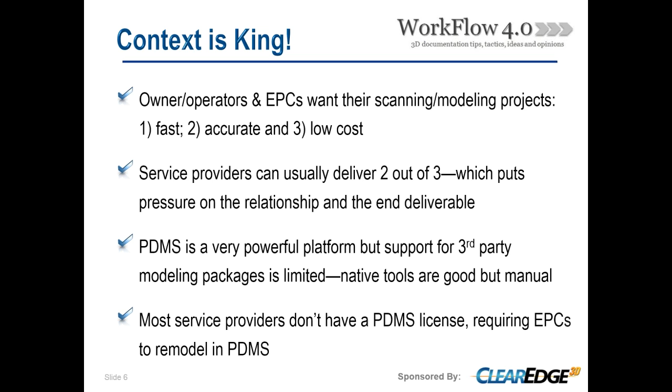And the workflow that Matthew Bird is going to talk about really dramatically reduces that whole amount of time. So let's go to the next slide, and I will hand it over to Matthew. Matthew, you're with us. All right.

Yes, good morning, thank you. All right, take it away, Matt. All right, thanks for being here.

We're going to be reviewing a case study of a recent oil processing facility that we did scanning and modeling on. So we'll go to this next page.

First, a little background on DeWalt Corporation. Located in Bakersfield, California, just about an hour north of Los Angeles, DeWalt was established in 1965, a civil engineering and land surveying firm, working a lot in residential, oil field, and multiple other services and industries.

So our scope for this project, as you can see on the right in the blue highlight, is the entire 600 by 600 foot area that we were requested to scan. Inside that is the entire facility, as well as outside areas of pumps and pipes, and in the middle there it's quite detailed.

First we were to scan that and provide an ortho photo of the site, which we produced from the point cloud, and we geo-referenced that onto the coordinate system they're using.

Next, we would deliver a complete 3D colorized point cloud, which we found very useful inside programs like Navisworks for site visualization, just using it to review a project with a clean point cloud.

It's very useful. We would then do the as-built 3D model of a requested area. We didn't model the entire facility, as they have it split up into different sections based on what they would be utilizing currently. You can see on the bottom right, highlighted in red, the area where we would begin our modeling.

Once the modeling was done, we were to deliver it onto a requested coordinate system and be able to import that into PDMS and AutoCAD formats.

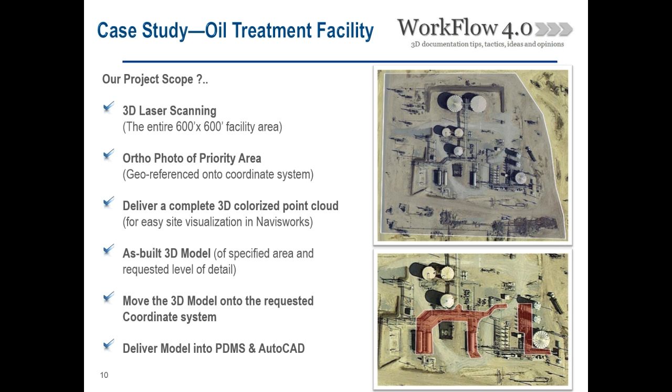So here were a couple unique challenges. As you can see on the right, some of those areas inside of the red where we were to model, from the top aerial photo, it doesn't look quite all that detailed, but once you get inside the site, you can see in these pictures there's a lot going on. There's a lot of pipe, supports, valves, flanges, just a lot of stuff that you don't want to miss.

So we needed a quick turnaround time. Our goal was to do 3 weeks from start to finish.

Another unique challenge in a large project is managing your data. We ended up with nearly 500 gigabytes of data. As you know, with scanning, scan files, as you bring them into multiple softwares, they can create their own specific file types inside different softwares, just compounding and compiling new files and new sizes.

And of course, because of the amount of modeling we had to turn around, that was another challenge. Estimated over 3,500 feet of pipelines, and inside of all that there's valves, flanges, pipe supports, concrete foundations, vessels, tanks, equipment, and a lot of steel.

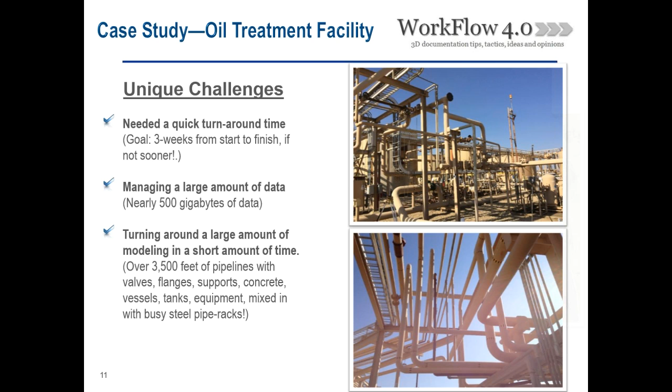So we'll move on to the next page here and go over a little bit of our workflow. The image on the right is kind of a way that we use to do planning and mapping on how we're going to best capture a site when we get in.

So the scanner we used is a Faro Focus 3D. We're very happy with this hardware and equipment. We start by using the aerial photo and map out a per day scan area we want to try to capture. We had a priority area being what we needed to model, and we made sure we covered that first. As a best practice, once you get in the field, we would choose where we want to start and get that first scan going as quickly as possible.

During that first scan setup scanning, depending on your quality and resolution, you'll have 3 to 10 minutes of a window that you can continue mapping out your locations for the next scan setups while that first one is going. This just kind of helps you maximize your scans.

So as the scanner is going, we'll walk through the site and map out the scan locations and the best route to make sure we capture all the data that's needed. As you saw in those previous pictures, there's a lot of things to capture, and if you don't have the correct and enough setups, you may miss some critical data.

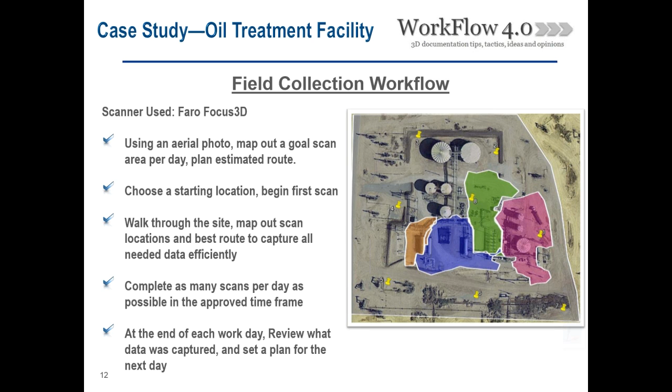Of course, we would complete as many scans per day as possible while staying in the approved amount of time. And at the end of each day, review the data captured and set up the plan for the following day. So we know where we scanned, where we ended, where we started, what was captured, and what might have been missed. That just helps make everything go efficiently.

Our field crew is normally 1 to 2 people. The tasks on the field side are laser scanner operation, just moving the scanner, going to the setups, starting it. If you're using targets, making sure you have your targets set up, moving those in between setups.

Walking ahead, if you're in a field and dirt, we'll sometimes use paint or put something on the ground and plan our scan setups beforehand. We'll also take photos of whatever it is that we're going to be scanning and modeling. That way, if something is blurred in the data or something might get missed, we can go through photos and see detailed pictures. Those are just ways to make sure that we capture all data that's needed.

Planning your route ahead of time is a great time savings and a good way to make sure you don't miss anything.

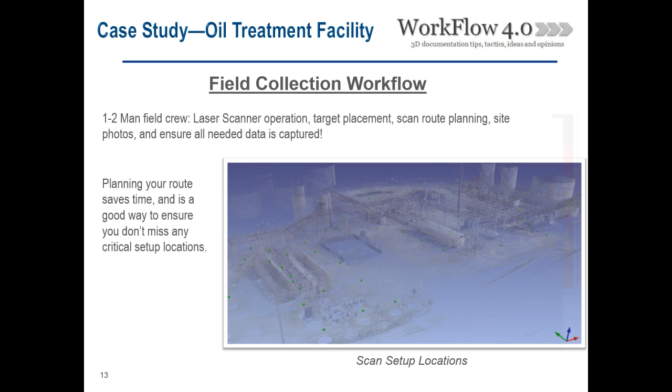So once we're done with the field portion and we get all of our scan setups, on this specific project we utilized Autodesk Recap Pro, which is a new software for registering scans targetlessly. We also did use Faro Scene a little bit, kind of a combination here. Autodesk Recap Pro actually was released and came out the week that we were using it in this project. We were one of the first people to actually get it and utilize it as the released version.

We registered our scans, indexed them into the Autodesk Recap project format, and from Autodesk Recap you can export it to multiple file types, and from there move it into the preferred modeling software. As you can see here, this picture is actually inside Autodesk Recap, and we have it in an elevation view. There's some cool tools inside of there, and this is one of them, so you can set it up and see the ground contouring. You can see where water might gather. Just some cool tools.

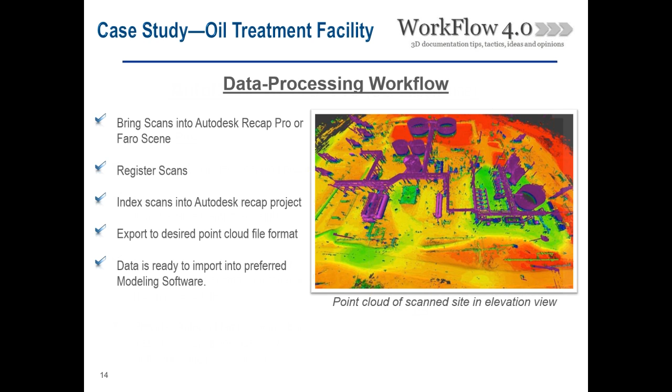So, some of the experience we had during using Autodesk Recap Pro. It is a new software. There's a lot of interest in it, and this is some of the things we've seen.

Some of the pros, obviously in scanning, as you know, targets do take up some time. If you can go to a site and use no targets, and all you have to worry about is moving your scanner and keep scanning, it's really quick, it's really efficient, it's great. So if that's all there was to it, it'd be great.

There are some other things though. Like I said, it does overall faster laser scanning because you don't have to move targets and worry about line of sight and making sure you have enough targets. It does turn your field portion into a one-man job. You won't need two people if all you're doing is moving the scanner. You don't have to move your targets, you just plan your route and scan. It's very, very easy and efficient.

And also Autodesk Recap, being an Autodesk product, the file types that it provides, the RCS and RCP, are great for other Autodesk applications such as Navisworks.

Some of the cons that we've seen are because the software is brand new, it does have some things that need to be worked out. We had some stability issues in the beginning. It would crash sometimes randomly, and it wouldn't save our progress, but we were able to work through those things, and I think they've already fixed some of them in some patches and releases, so things are continuing to improve.

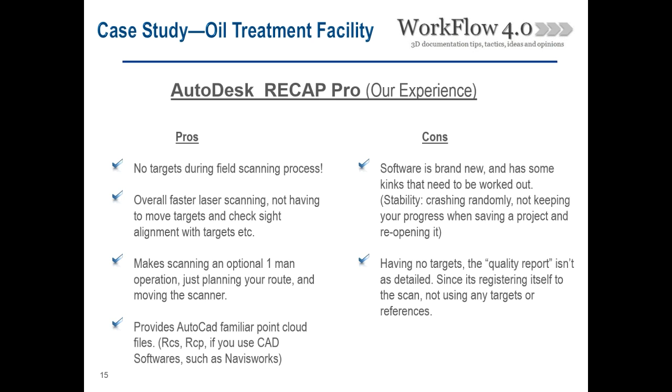Some of the suggestions, if you're interested in using Autodesk Recap Pro, is go ahead and download it and use a past project you've already done before getting into a new project. This was kind of a way we trialed it before we used it. So take your old scans, even if there's targets in it, it doesn't matter, you don't have to take them out or anything. You just bring them into Recap. It has a great, simple interface.

Just register those scans, and you can compare it to the quality and what you've done on your last project. You can compare those point clouds and see how they work out for you. And then, of course, if you're actually interested in switching from targets, like I said, on your next project, scan with your targets still, and then bring them and register both ways. Use your current software and Recap, and kind of compare the time savings in both, as well as the quality and accuracy.

So kind of summing up our overall experience with Recap, the data looks great. Being able to take that file exported from Recap into Navisworks is a beautiful way to just visualize your entire site captured. The registering is very easy, you just go in and click a couple similar locations and it ties it together.

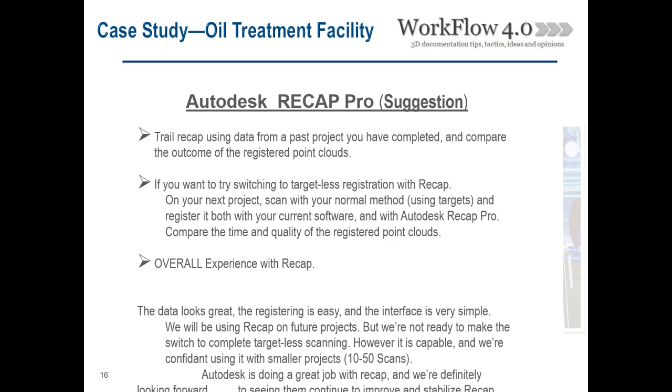So next, after doing the scanning, after doing the registering, and having a point cloud ready to use, we move into our 3D modeling. On this project, we would take and import our registered scans into Edgewise Plant, and INOVx RealityLINx is the other software we use. As we know, Edgewise Plant currently is for modeling pipelines and components such as valves, flanges, etc.

So we would use our modeling in INOVx and Edgewise, and we would model everything that was requested in the contract, making sure that that's something you follow. When it comes to a scanning and modeling project, making sure you discuss the level of detail and what all needs to be captured is a huge thing you want to make sure is covered.

So in this, we modeled a couple of the tanks, vessels, we did steel structure, pipe supports, we did a ground surface model, pipelines, nozzles, valves, flanges, pretty much everything inside of our specified area.

So here are some examples. We're going to review how we utilized Edgewise on this specific project. Here are a couple images showing our point cloud inside Edgewise.

As it says in the text here, when I process the scans, that's literally a button you push. You set up some settings, and that's where it creates this point cloud in Edgewise format. It'll extract cylinder shapes, pipelines, and you also have the option to do your ground model from there.

Edgewise also has a smart sheet, which is the quality inspection tool. You can easily go through and remove things that it grabbed automatically that maybe were not a pipeline but were cylinder shape, you can go through and delete those, and you can easily go through and check the quality of your pipeline to the point cloud and adjust it if needed.

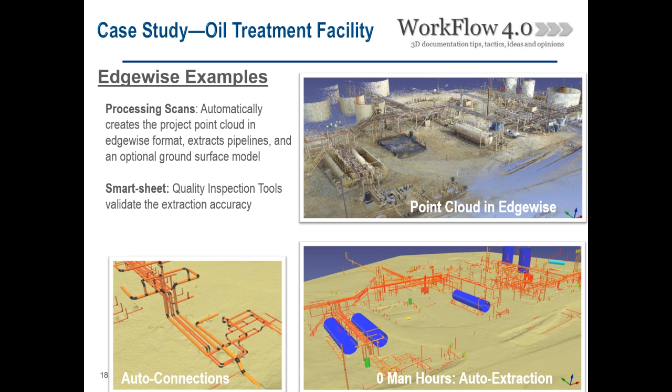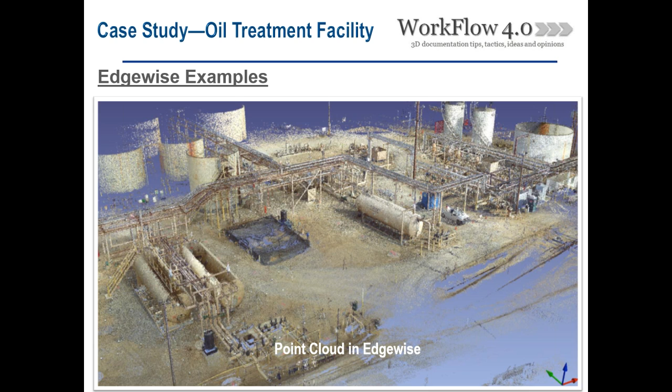So we'll go to these. We have a couple pages with some bigger images here to review these slides. So here's a portion of the point cloud inside of Edgewise. It does a great job creating its own format, and it looks good. And it's easy to move around inside of.

So from that point cloud, this is what it automatically extracted inside of Edgewise. You can see Edgewise does have a great tool for automatically extracting. There is still a portion where you have to go through manually and do some cleanup, delete some things, but it gives you a great head start being able to model a lot. So here again is the comparison from the point cloud image to what it automatically extracted.

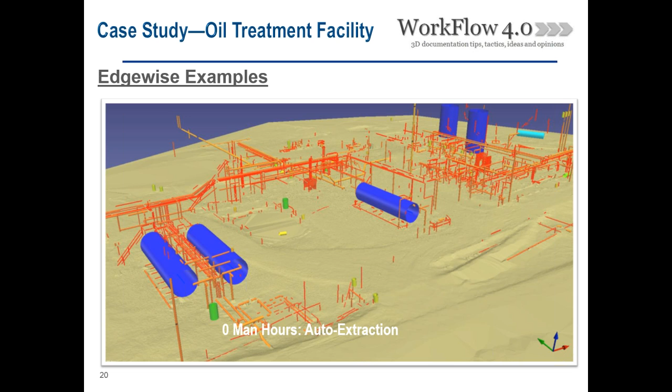So when you're dealing with a lot of pipelines, it's a great tool to give you a head start on your modeling. This next slide here shows some of the pipelines in Edgewise and another tool that Edgewise has of automatically cleaning up and connecting your pipelines. It will add elbows, and inside of Edgewise you can also add T's and reducers, flanges and valves.

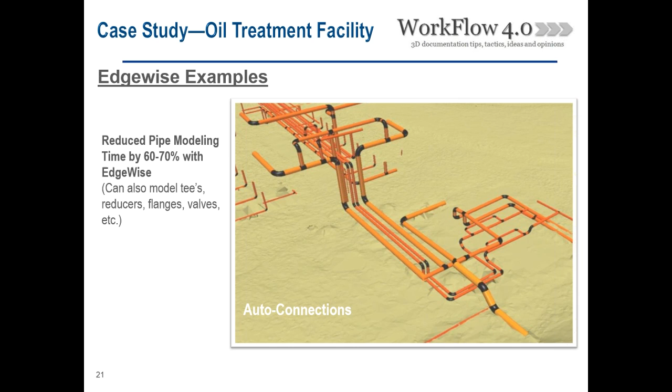On this specific project we did not utilize Edgewise to its full capability of doing the flanges and valves. We used it for doing all of the pipelines though, and it definitely reduced our pipe modeling by 60 to 70%. It's definitely a great tool for anyone dealing with pipeline modeling.

This gave them a great start to come in with accurate data of what is in the field already, what they can do with it, and they can start using this model to design off of. They can run new pipelines on existing pipe supports without hitting things, knowing what to move and what to use.

We delivered this into PDMS and AutoCAD formats using Edgewise export utility and INOVx RealityLINx. The portion from Edgewise has a way to bring it through intelligently by actually converting the model into PDMS components, which we'll see from John Hill in his portion of this presentation.

We also delivered the orthophoto on the coordinate system, which we did in Faro Scene software. It has a way to take the point cloud and clean it up and give you a top view and make an accurate orthophoto, which we could then bring into AutoCAD and place on the coordinate system and use it like it's an aerial photo with accurate measurements.

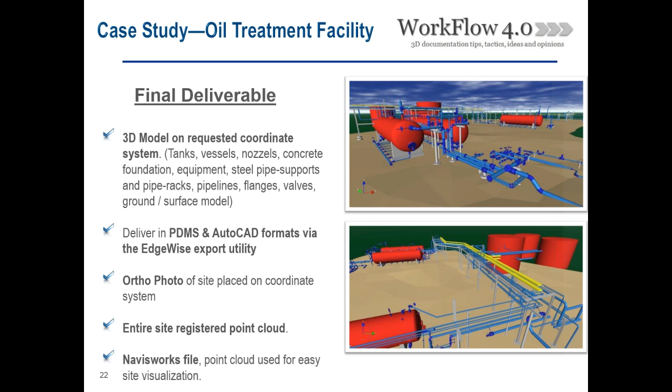We also delivered the entire registered point cloud, and we delivered the point cloud in the Navisworks compatible format from Autodesk Recap Pro. That's a great way to visualize your site and use the point cloud for more than just a modeling tool, but really as a site visualization, walking through it in 3D. It's a great tool.

So some of the overall tips and tactics I want to leave you with. Some of these may be things you already do, some may be new. I just want to share what we utilize.

On any large project, we see that it's critical to visit the site, because if you get sent a paper - which if you've done scanning for a while, you'll know you've gotten one of those projects where somebody sends you a piece of paper with some lines on it and says they need a couple things scanned - then you get to the site and it's an entire couple weeks worth of scanning.

Before you do any estimating or proposals or anything official, if it's a large project, you want to visit the site so you can really get a feel for what is the level of detail. How long is it going to take?

Secondly, communication and a working relationship with your client is definitely key. Just being open with them, giving them realistic goals and how long is this going to take, what can you actually do, give them some tools to utilize.

Third, be very specific in your communication with them and in your contract. When it comes down to the 3D modeling, being very specific to what you need modeled and what is the level of detail that you need. That can be one of the biggest time differences - what you're modeling. That's definitely where the time's at. So make sure you're specific with that.

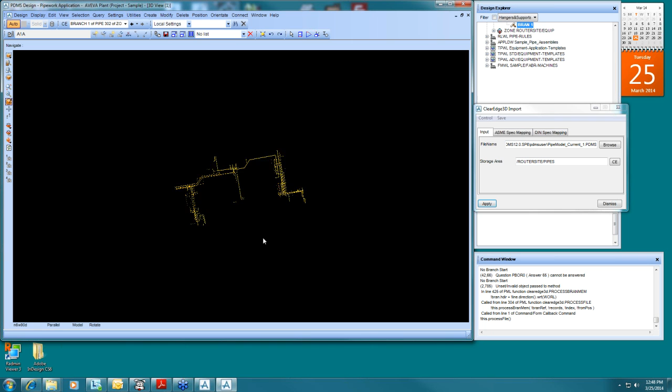Now this is the pipe routing that was processed in the model. And as you can see, there are a few lines that have dash lines, which are at the tail of the pipe or at the head of the pipe and stuff like that. That is primarily due to the accuracy of the scan.

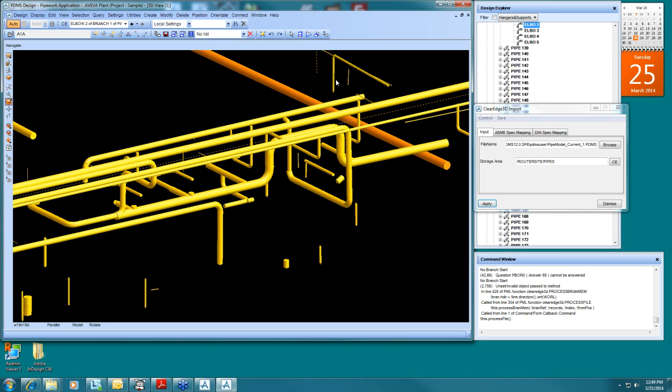If you have an elbow like that, which is a socket weld elbow, and the pipe is deflected or bent, the elbow can't take up the angle because it's a fixed 90-degree angle. In most cases, like for butt weld piping, these elbows will have a variable angle on them so that it will adjust to the angle of deflection of the pipe.

In PDMS, you cannot bend the pipe or anything like that. You would have to go in, if you want to clean this up, at the end of this socket weld elbow, put a zero-length variable angle bend, like we do for slope piping in PDMS when we model it, and have that directed towards the pipe tail with the implied tube coming in at that point.

During the processing of all this, there is also a text file that is created that shows basically the errors generated during the import of these pipes. You can go through and it'll tell you that this elbow can't be directed and so on, the standard PDMS errors that are generated.

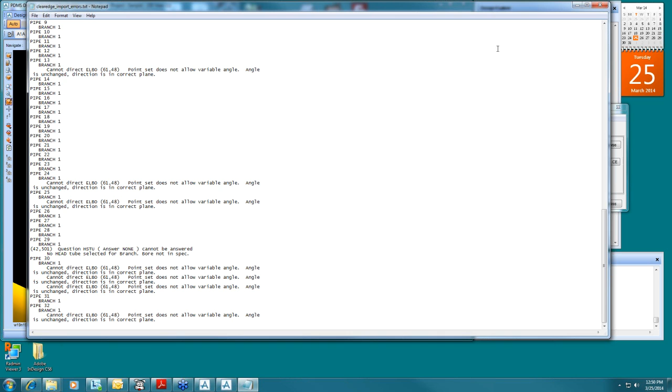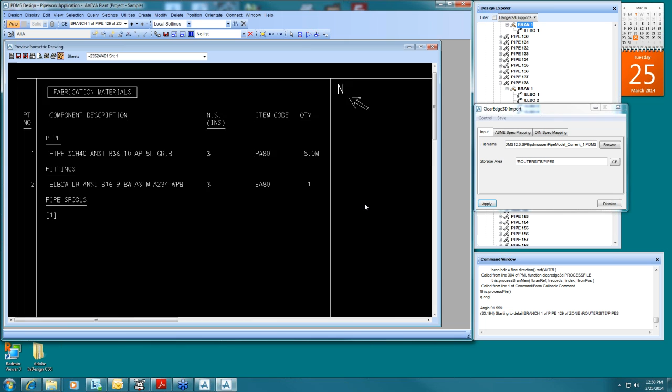If we look to show that it is actually a workable 3D model, we can go in and ISO the line. You will get your standard MTOs out of it, and you'll notice that there are angular deflections in these pipes, so it'll also show you all of that.

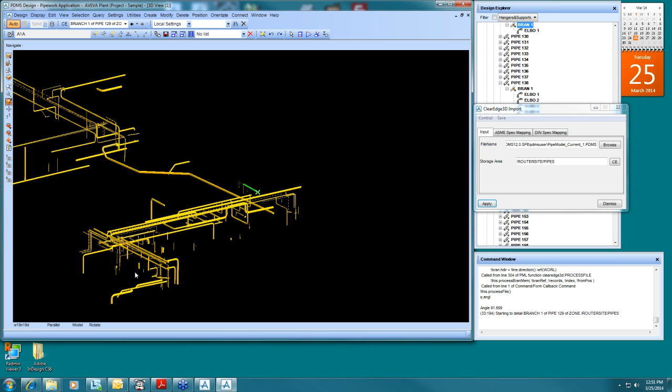Everything comes in as defined within the scan, positioned based on the scan data. We have cases where valves and flanges were modeled - these would need to be standard, like a generic gate valve. More than likely that was a globe valve, so you'll see it doesn't fit between the flanges like it should. There are a few things you have to do to clean this model up, but not that much is required.

This is a very simple interface. One thing Matthew mentioned was file size - the data file size cannot exceed 10,000 lines. So you would break up your export data into smaller chunks, but you can pull all that information into multiple sites or zones within the 3D model.

I've got a question from Jose Gaspar Lima: using the PDMS plugin, does the point cloud come in? What sort of point cloud support is native within PDMS, and can you bring the Edgewise point cloud into PDMS?

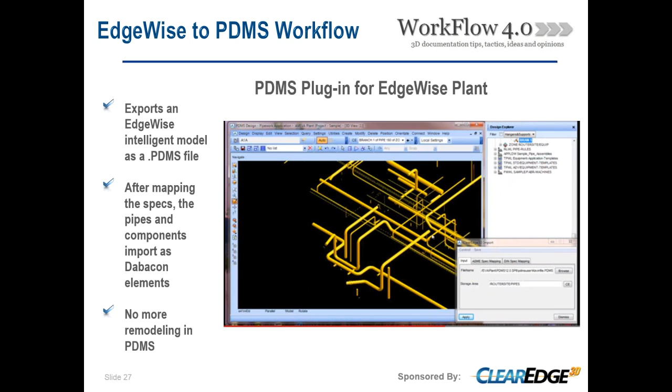Coming in summer, in addition to the PDMS module that John just talked about, which is available and working now, we're working with the CADWorx team to integrate with CADWorx via their PCF format, which also goes into Plant 3D and several other software applications. We're really excited about that, to extend the compatibility of our Edgewise models.

With the summer release, we're also going to overhaul a lot of the user interface for Edgewise Plant, and really clean that up to make it as smooth and nice a tool as possible. We've gotten a ton of user feedback over the last year with little tips and tricks we'll be incorporating. One of the biggies is improving the clipping box and point cloud slicing - it should be vastly improved by the summer release. We're also improving point cloud navigation to make it faster and smoother.

All right, Edgewise Structure. We're really excited about this. This is coming out next month in April, and it's looking fantastic. What the software is doing right now is extracting steel, and it does it very well. We're getting great recognition rates on the steel. It's very automated, and everything is based on specs, so every component we create is based on what's in the steel catalogs, and we're building out those catalogs now to include catalogs from a number of different countries.

Right now it's AISC, but we're working with some early beta testers to build out those catalogs. We almost have it exporting to Revit—should have that done in the next day or two. That's looking really cool. And then we'll be working with John to export to PDMS as well. It should be very similar to the PDMS export of pipes, so it should carry all the intelligence and be a very seamless export from Edgewise, handing off to PDMS and having an intelligent model.

We're also going to be making a beta available to existing customers very shortly. The feedback we've gotten so far is extremely positive, and we're looking forward to getting it into the hands of some of our existing customers shortly. And I believe that's it for me, Chris.